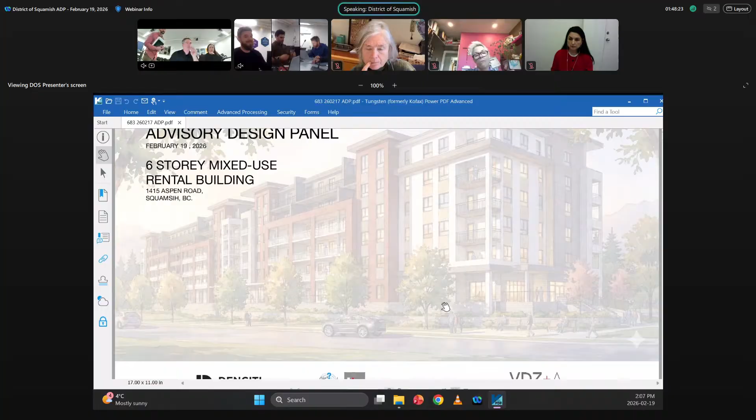Okay, so my name is Steve Watt, I'm an architect with Integra Architecture, joined today by Jessica Thiessen from Van der Zalm and Associates Landscape Architects, and Guadalupe Font from Denciti Development Corporation, the owner.

I'll give a quick overview of the design for this mixed-use purpose-built rental development. In context, the site's located in the North Yards neighborhood between Highway 99 and the future Pioneer Way connector between Aspen Road and Government Road. And there's a number of DP area guidelines that are applicable.

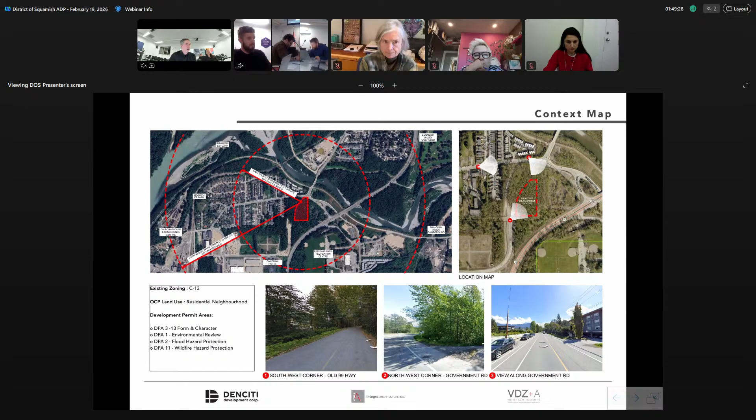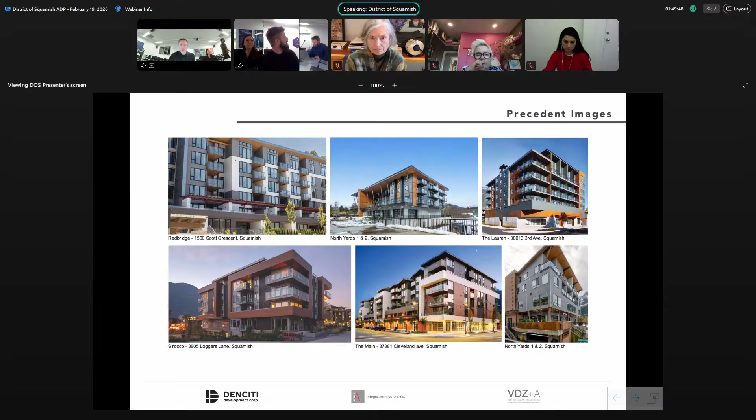So we're proposing a 6-story, pretty linear building, essentially 2 buildings with a connection to form a strong street presence along the new Pioneer Way. 163 purpose-built rental units are proposed, including 3,500 square feet of indoor amenities, a daycare, and live-work units.

Parking is provided at a 1-to-1 ratio in a mix of surface parking and underbuilding parking. This building proposal is contemporary in design, employing high-quality durable materials to satisfy the wildfire hazard guidelines, and will be subject to meeting Energy Step Code Level 3, Zero Carbon Level 4, and as such also employ several other sustainability objectives, including EV charging, low flow fixtures, energy efficient appliances, and heat pumps.

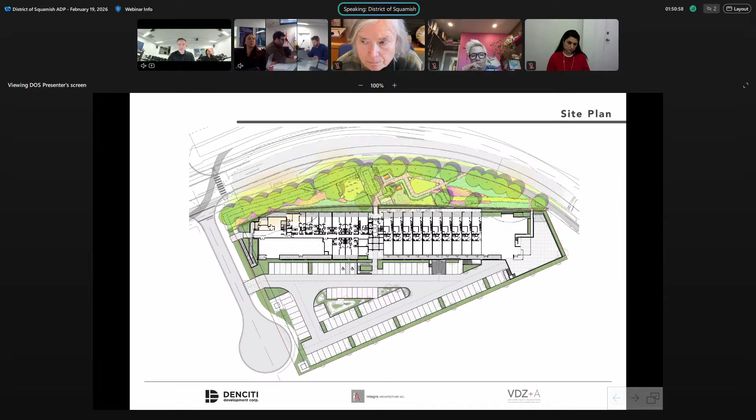Going to the site plan, the strategy is to create street presence with a linear building along the west edge, flanking Pioneer Way. Parking is concealed from this frontage by locating it to the east and under the building, accessed from Aspen Road. A commercial component is required in this project,

which is being delivered in the form of 10 live-work units, which are the sort of tan-colored number 8 there. That's in the north half of the building. There's also the 4,200 square foot daycare space, the blue number 6 at the north end. The south half of the building contains the main lobby and fire department access point facing Aspen Road, some residential

units, service rooms, and indoor amenities, which are to include a social room, work area, and gym, though nothing's programmed at this stage of the project. There is a purposeful break in the middle of the building to break the length and break the massing. This area includes vertical circulation and an arrival plaza off the parking area to orientate the commercial and residential visitor.

A pocket park is proposed for the orphan slice of land between Pioneer Way and the property line on the west, number 10.

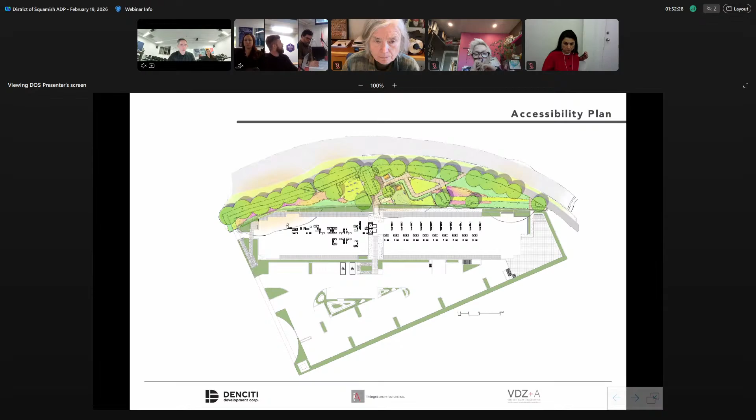There we go. This highlighting indicates in blue all the level 1 barrier-free access proposed to and within the building. We have 2 pedestrian ramps, one at the main lobby on the south side of the building and one adjacent to the central plaza.

Accessible parking stalls are adjacent to the plaza ramp. Some additional accessible stalls are located in the parkade. For this project, we have to provide by BC code 20% adaptable units, which we will be doing. We have not selected which units will be applied those provisions

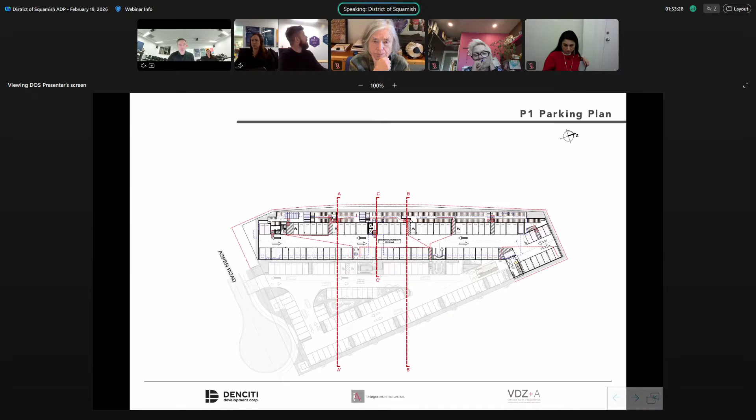at this point. Quickly on the parking plan, we've tried to minimize this for cost as much as possible. It fits snugly under the building along the west edge of the property. We have garbage storage in the elbow on the north side, which has direct access out to the drive aisle for ease of collection. And all our bike storage is located in this underground or underbuilding parkade.

Level 1 we've sort of discussed already through the site plan. Level 2 to 6 for construction and structural efficiency, the plan is stacked through all levels. And you can see more clearly on this one, the minimal connection, which is a double elevator and an exit stair and a corridor.

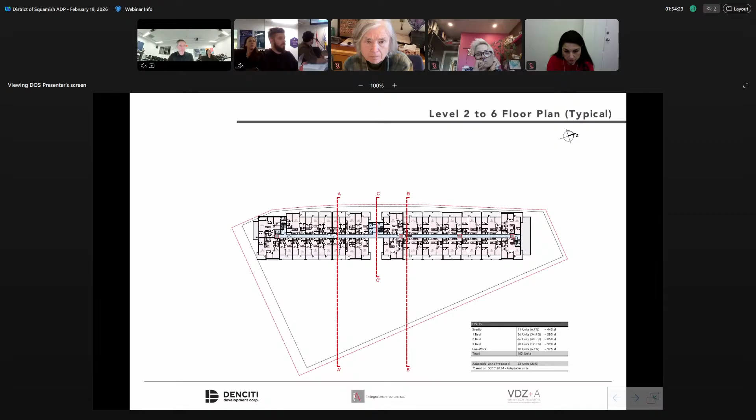To the building elevations, to articulate the massing, we've expressed the corners with roof pop-ups and frames. We've framed the balconies in groups and used color to add to the perception of recession, using the dark to appear to recede, the white more of a foreground color. The points of entry and circulation are marked commonly with the wood-toned wall accents against the white cladding.

The end elevations, north and south, are much simpler. The south elevation includes the main lobby and includes some stone cladding at the base and signage, as well as the wood tone material in the white cladding above.

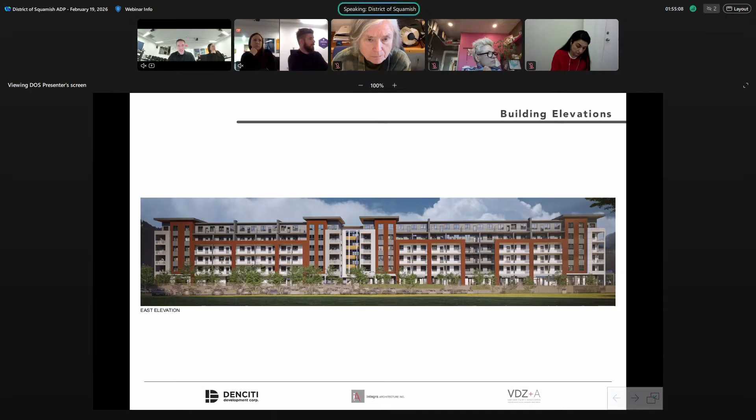The east elevation facing the surface parking is treated similarly to the Pioneer Way frontage, but includes commercial signage opportunities along the face of the live work units on the right-hand half, with the daycare at the extreme right on the first floor.

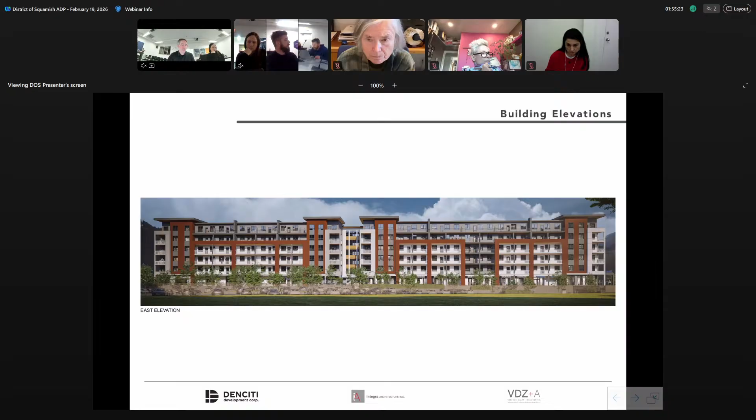This image shows more of the richness of the materials proposed, which include red corrugated metal, fiber cement lap siding and panels, wood-toned lap siding and wood-toned soffits, and aluminum picket railings throughout.

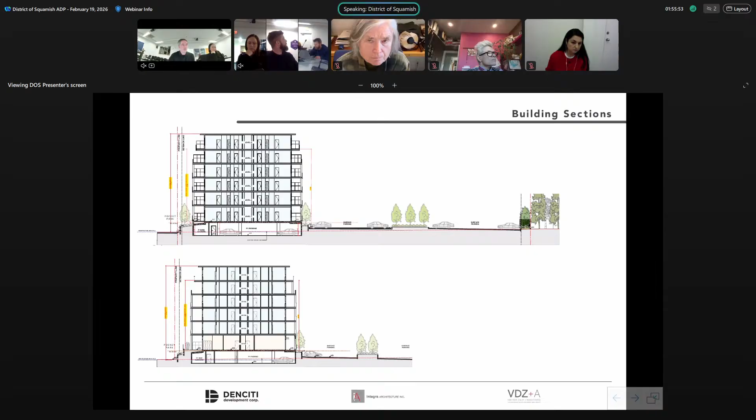The sections are fairly straightforward. We are, of course, raising the first floor to comply with the flood control level. The section on the right, lower right, shows the reduction in massing at the plaza break midway in the building and the potential for a through connection to the pocket park.

There's some shadow studies, fairly self-explanatory.

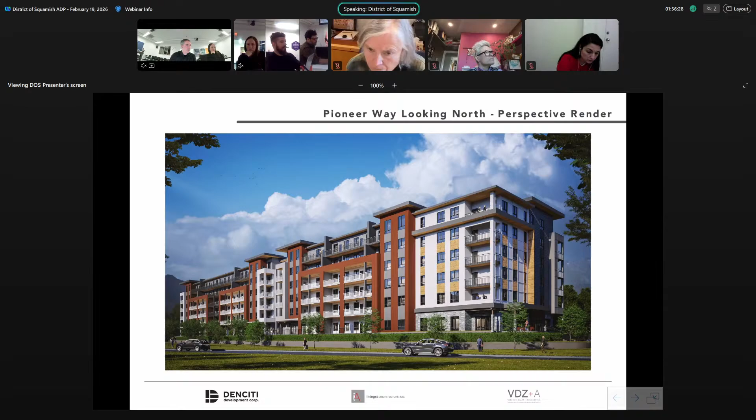And then some renderings, the frontage on Pioneer Way from the Aspen end, and then from the opposite end with the daycare in the foreground bottom left.

And then a view from the surface parking looking towards the central plaza with there'll be some commercial signage there, and signage along the live work units heading towards the right.

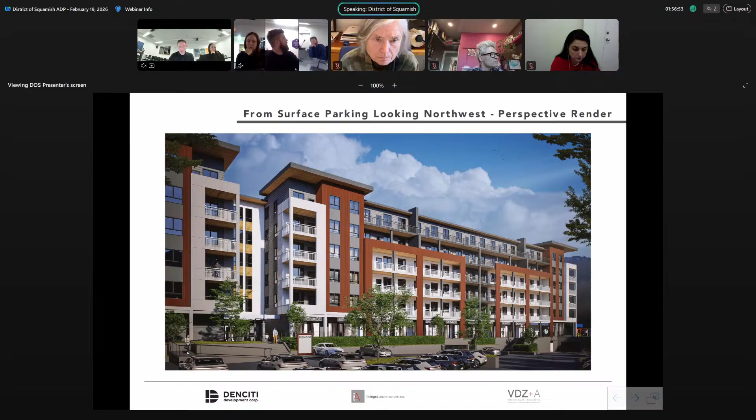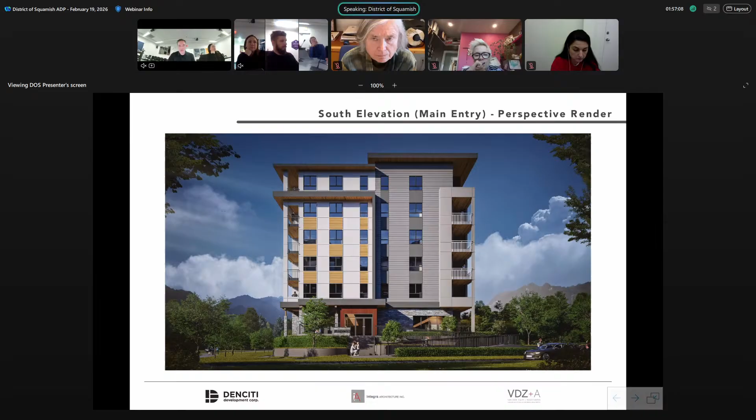Close up of the south elevation, just to show the pedestrian access. There's a sign at the top there and the cultured stone material at the base.

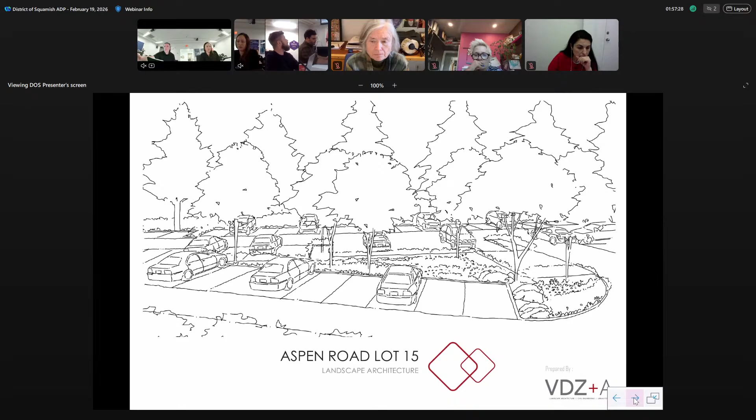Okay, so we've looked at the site plan already a few times, but I'll just cover a few different landscape features throughout.

We have, if we start on the Aspen Road side there, the entrance, the main lobby of the building. We have an accessible ramp that goes up to that building, as well as a staircase that gets us up to that flood construction level.

Throughout the parking lot, we have a variety of trees to provide some shade and greenery. We have a river rock bed in the center of the parking lot that may end up providing some stormwater management, but otherwise is a sustainable and drought-resistant feature of the landscape.

Through the middle, between the two buildings, we have a courtyard that will lead you from the parking lot through to either building, but then also through to the pocket park that is on the west side of the building.

We have on the north end the outdoor area for the daycare, so that's taking up the majority of the outdoor amenity space on site. That is the size required for the size of the daycare that we're proposing. And then we have a few different access points to the west off of the site and into the pocket park for lots of pedestrian connections through the site.

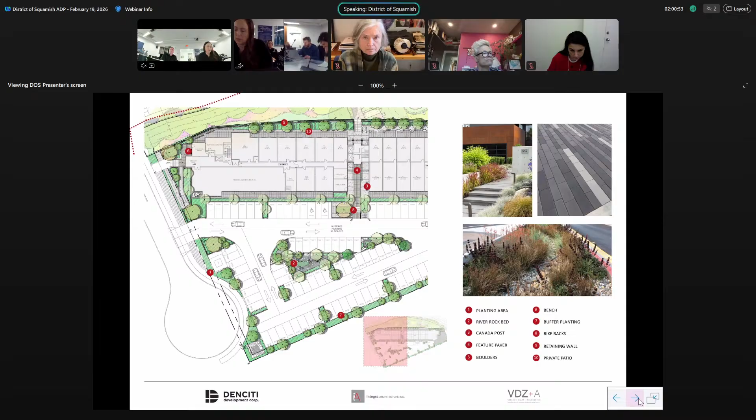In terms of plant material that we're looking at for this project, we have a variety of native and adaptive plant material. We've focused on plant material that is bird and bee friendly, but also we are trying to strike the balance between the fire smart regulations and not attracting wildlife. So this is where we've landed. We have a variety of bloom periods and features within the plants.

Oh, that was it. Thank you.

Excellent. Okay, thank you very much for that.

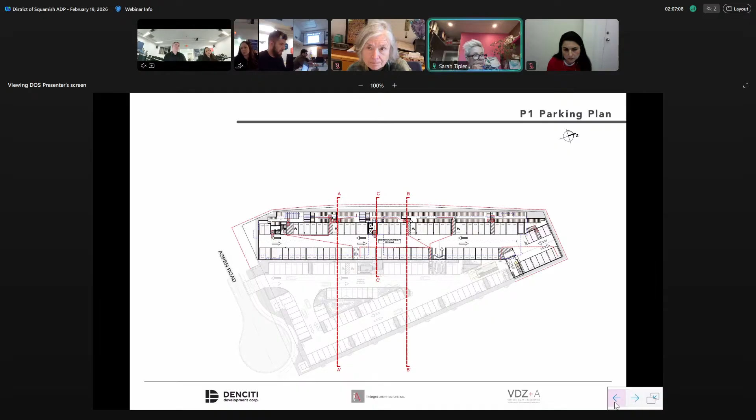And then it seemed that you were going to put a number of adaptable units in the live work spaces, and it looks like they have a wheel-in shower, but with a door on them. Is that correct, is that sort of what you've done? The live work units will be provided with an accessible or universal washroom.

These 10 units won't be the sum of all the adaptable units in the project. We have to provide 33 in total, so there will be a mix of units provided as adaptable on the upper levels.

Can you tell me, are all of the main entrances, and the entrance to the daycare and the garbage, going to have automatic door openers? Main entrance to the building for sure. By code, I'm not sure if the daycare would require it, but we can always provide it. That daycare provider might want to provide it anyway. Yeah, that's all my questions. Thank you.

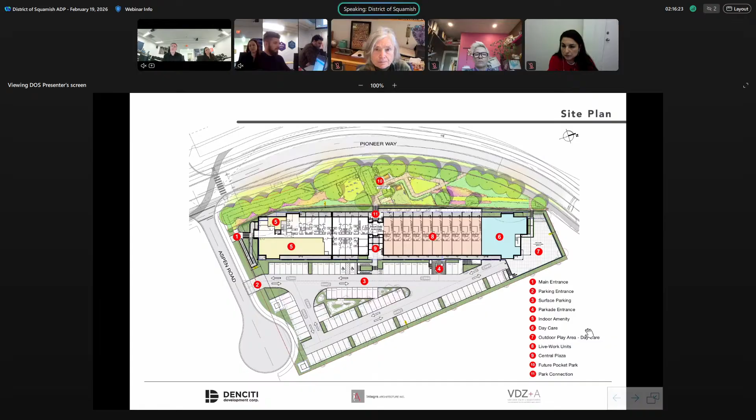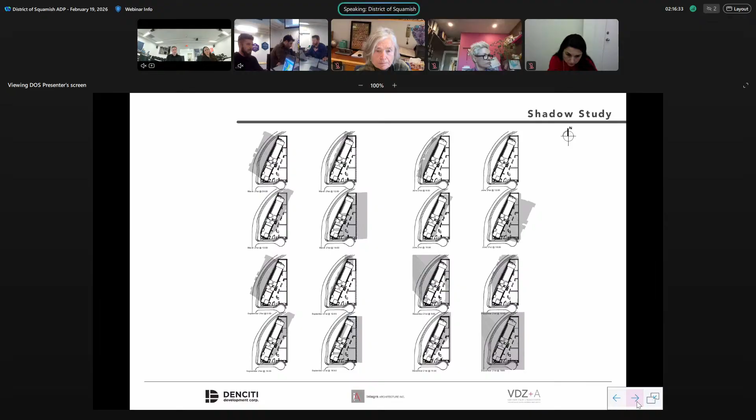Thanks for the presentation. I had a question on the tree schedule. There's a list of trees proposed on the plan, and it's slightly different than the images on the planting palette. Is the Acer platanoides still proposed as a significant tree component in the plan? The trees on the drawings would supersede what's in this image slide.

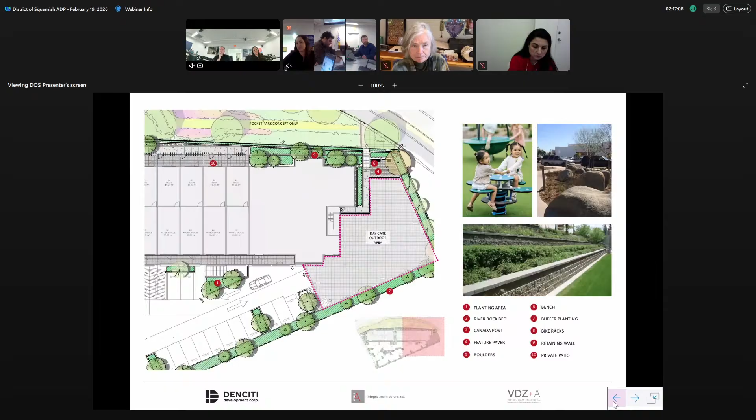Okay. And then so the pocket park is a concept only, so we're not commenting on the design of the pocket park at this point, or? We'd welcome comments on the concept as it currently is, but there are still finer details to be worked out with our parks planning team. Okay.

Are you able to give a brief overview of the elements of the pocket park? Yeah, I can give you a brief overview. I wasn't involved in all of the discussions. We did a concept based on what the district expressed some interest in. The main component is a dog park, a fenced-in area. We also have a bit of open space and some social gathering space with seating and hardscape. Primarily the pocket park is open space and naturalized planting.

And then, you might have said this and I missed it, in the parking lot the central area with the river rock bed, is that to act as a rain garden, collecting stormwater? At this point it's got potential for that. We haven't gotten into detailed stormwater management, but we felt it was a good feature regardless of whether it could be functional for stormwater management.

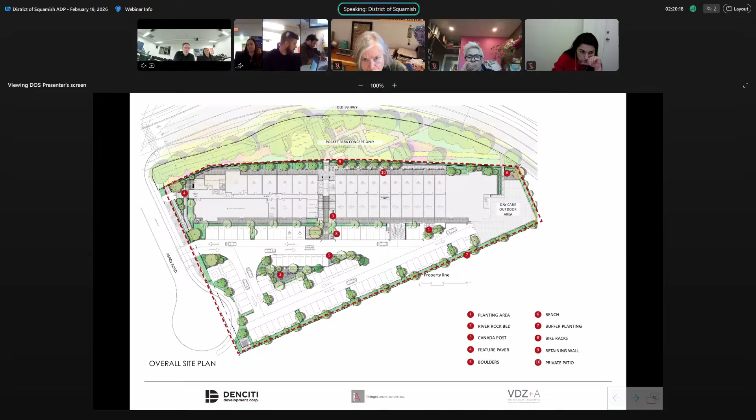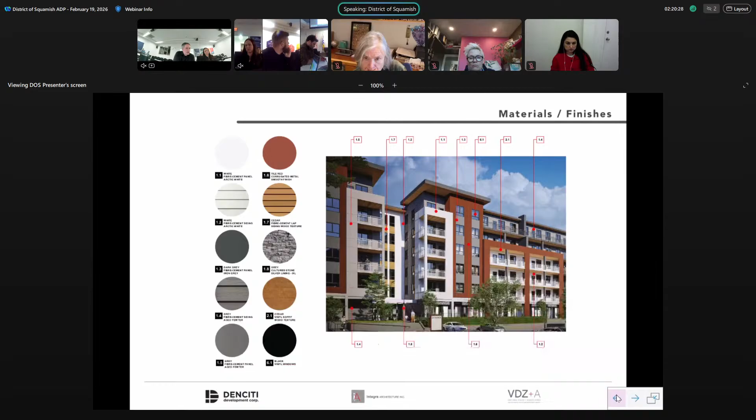And then, what's the area of the covered outdoor area for the daycare? Is there anything proposed for that, or is it still in flux given that it's not designated yet? It's still somewhat in flux. We did allude to something in one of these renderings here, this elevation — this part here is covered. I know there's a proportion that has to be covered for daycare. We would just need to flesh that out when we get more detail.

Would the intent be that when you know how many kids there are and you have that required overhang, would it be an architectural solution or more proprietary? I think we'd lead with the architectural solution — I think it ties us into the building really quite well there. Okay, thank you.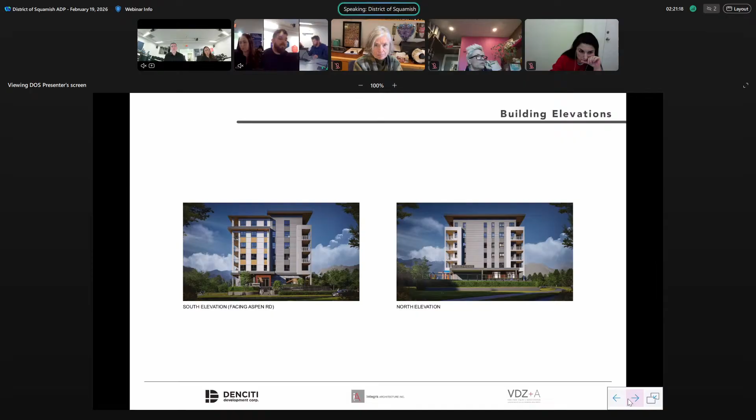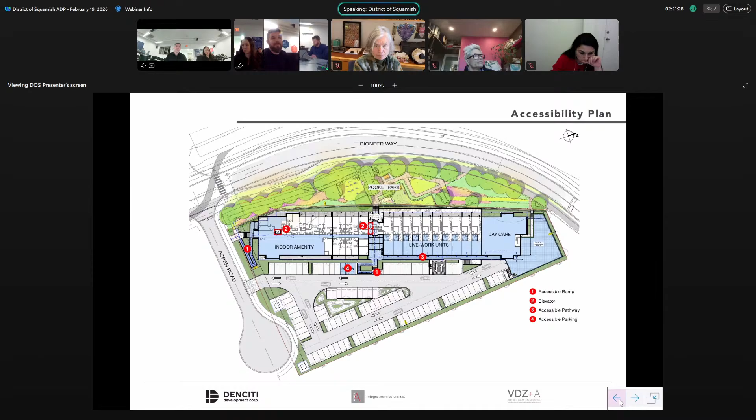Quick question for staff. I didn't manage to see it in the stats — is the garbage room meeting the minimum size requirements? I believe they had some stats on the drawing package, not in the... Oh, I looked at the applicant package. Yeah, they were both attached. Anyway, there are some numbers in there. One thing to note is it doesn't have separated commercial and residential — that's probably the only item that doesn't strictly align. Okay, thanks.

And is there a requirement for one firewall in this building? See in the plans.

That is correct. And the strategy for masking that was to add additional ones on the elevation - we've used that as a recurring motif just to break up the facade at the top two levels.

My last question is about the strategy for signage and lighting of these commercial workspaces. I saw a note for signage that looked like it was mounting to the fascia, but there's no detail. It's a little early in design development for that, so we have placeholders - thinking hanging signs for the live-work units, maybe a fascia mounted sign for the daycare at the end of the building, a monument sign at the base of the stairs for the central plaza, and a main entrance sign on the south elevation at the lobby.

What was the thought behind the general commercial strategy for those entry doors? Is it a storefront system, mostly glazed, or punched openings on the elevation? I think it was more punched openings for this stage. We may lean towards a storefront if we get more direction from the owner. Okay, thank you, that's all my questions.

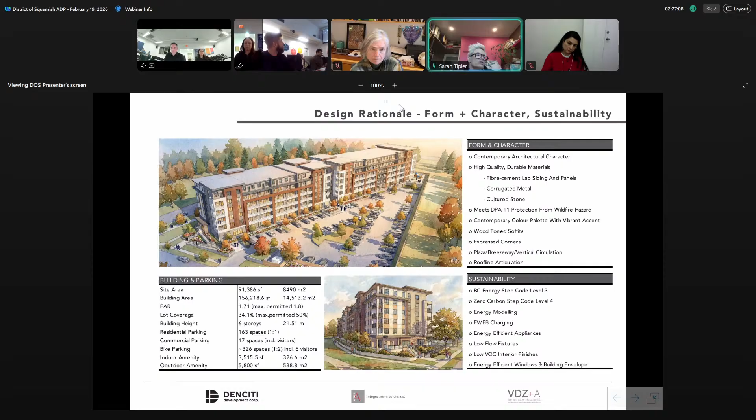Make sure that you've got tactile warning strips at the top of both sets of stairs, just because access to the ramps and stairs are relatively close together. I'd encourage you, in the adaptable units with a wheel-in shower, to ensure the shower controls are located centrally in the side wall so they're reachable from a seated position. And though I know it's done for cost, I would avoid cultured stone if possible. That's all my comments, thanks for the presentation.

Thank you, and next up I had Kim.

My main comments are on the entrance, particularly the entrance at the center of the building, at what you call the plaza, I think, because that's the one that's obviously going to be used. Architecturally, it doesn't read that strongly. I think if you could do something stronger to really punch that out, that would improve the readability of the building.

I question the entrance to the daycare, because you're going by all these - I guess they're live-work, are they stores? I'm not quite clear on what they are. They're very small, so as a live-work space they're quite confined. But taking your kids past all of that, I think, is not ideal. If you could get an entrance that is more for the daycare, at the daycare, with a drop-off there, that would perform much better.

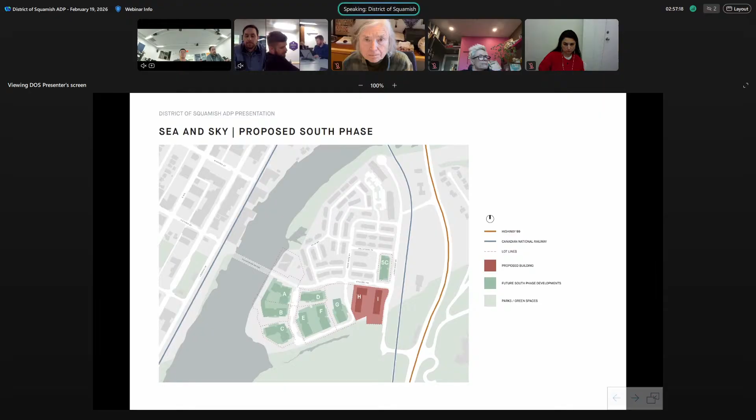You can see the scale of the townhouses to the north is quite a bit more fine grain, but they've also set up a bit of a language that we're trying to pick up on.

So you can see in some of the images here, still fairly simple forms, and the roof forms really identifying the residential character, and a more vertical street wall, differentiated by colors, but overall fairly simple massing.

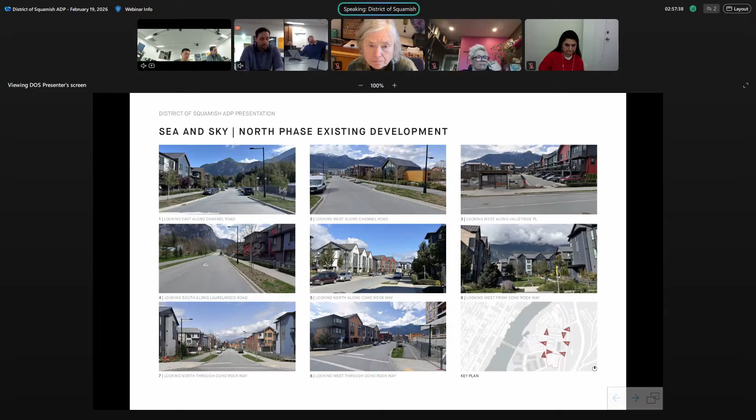When we started to rethink the initial rezoning massing, we went back to the OCP and the principles, in particular the views that are really important on the site, both views far and near, and also the porosity of the site. So that's really been a driver.

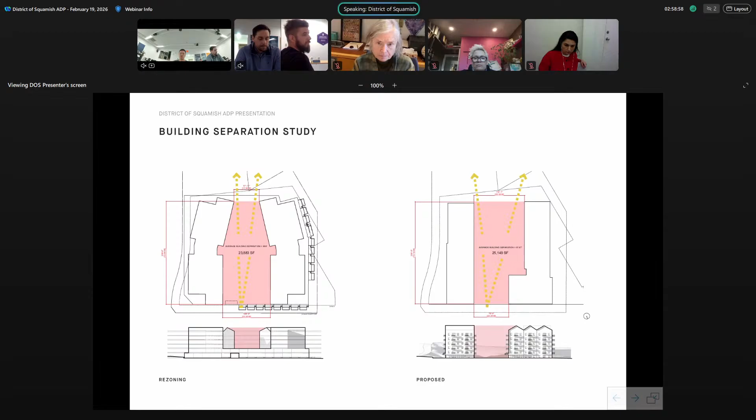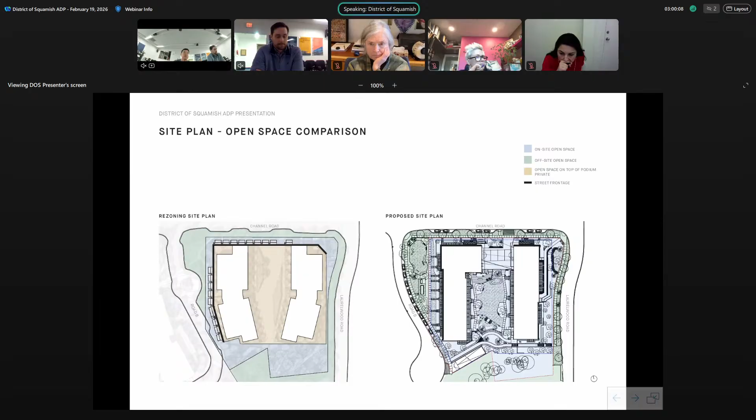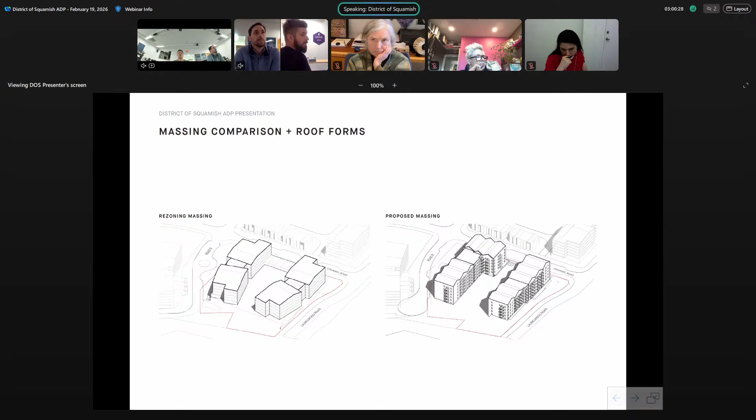A massing comparison in terms of roof forms: on the left, bigger, boxier, shallower pitched roof forms, versus what we're proposing on the right, much more compact, but still identifying the individual vertical elements accentuated by the roof forms, breaking up those bigger masses into smaller elements.

This view shows the northwest corner, dog park in the foreground, and how the building sits in the landscape as opposed to being flanked by row houses and townhouses across the perimeter.

Is there anything to add on the dog park? Or at this point we'll get back to you in the landscape design. But I think we were really happy with moving away from the townhouse and how much greenery is allowed at grade now, and the function of the ground floor units being able to go right to the sidewalk.

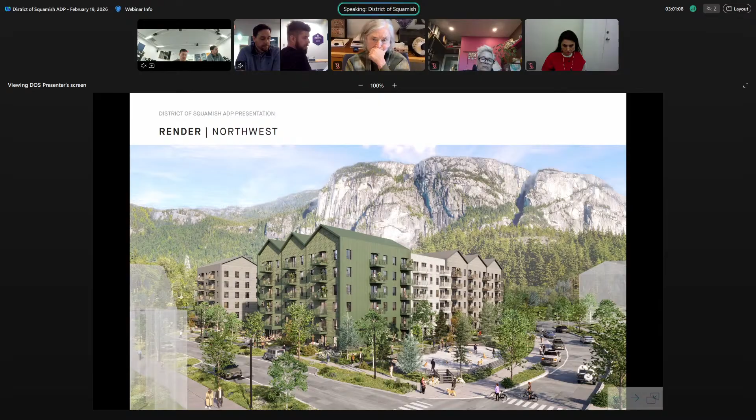So the open space site plan, the arrows emphasize the porosity created through this design. The red arrows indicate the main residential entries on the north. The parkade ramp has also been shifted relative to the rezoning to the south, so it takes it off the main street that provides access to this whole neighborhood. That's a big improvement from a traffic management point of view.

Then the forecourt that Kerry mentioned is shown with that beige dot at the top center. We want to bring all of the loading activity off the street, but also take advantage of the hardscape created for outdoor play, street hockey, that kind of thing, so it can actually be used by residents when it's not being used for loading. It's tucked on the side, so it's differentiated from where the residential lobbies are.

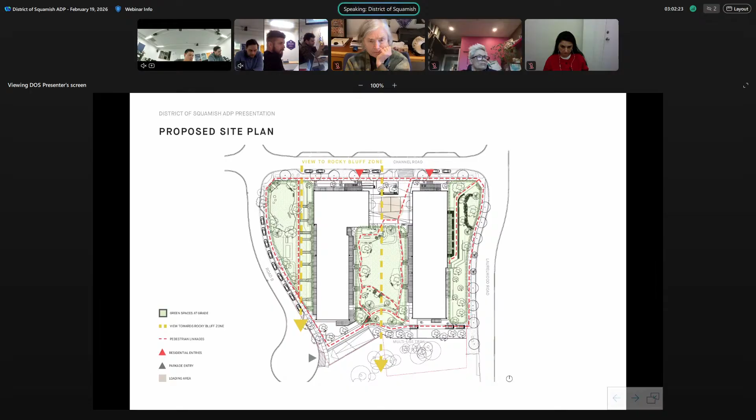The red lines represent circulation through the site. We have a lot of opportunity to traverse the site, both north-south and east to west, and access across the site via stairs to Laurelwood. This is a view of the northeast corner and how the grade starts to impact the form towards the southeast.

And just some gestures with the roof forms coming down and creating oversized scaled canopies to emphasize the residential entries facing north, and a contrast between a punched window expression for the residential level versus more glazed expanses at the lobbies.

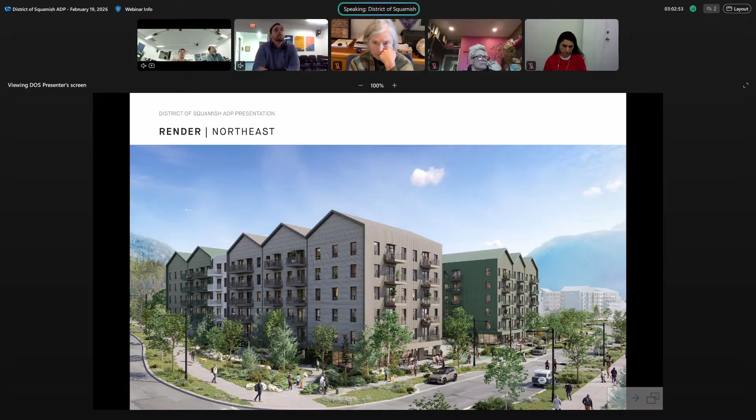Along Laurelwood, there's a pretty significant grade change, so your experience of the building will be quite different driving north as it emerges as you fall down the hill. We've taken advantage of that to tuck in bike parking in the southeast corner of the site, shown in white on the top elevation drawing. This allows accessible bikes at grade, so people can wheel their bikes across the site directly into the bike facility without going into the parkade.

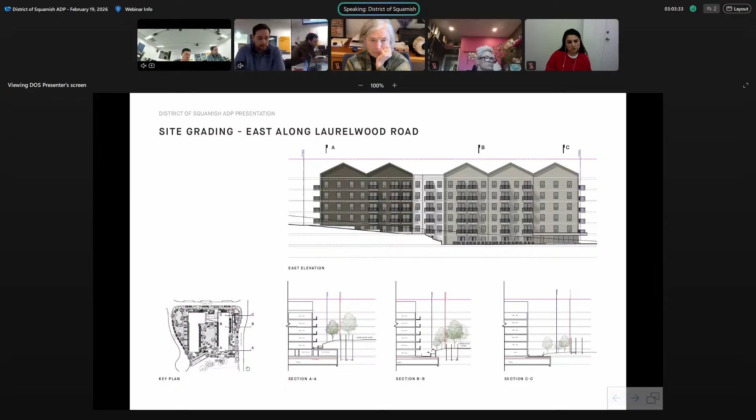A minor redesign of the rezoning pathway. The pathway shown in the rezoning to connect Laurelwood to the site to the west was a switchback, intended to be accessible, but Laurelwood itself is a non-accessible street with a slope steeper than an accessible ramp. That switchback also impacted trees in the southeast corner. So the proposed design is a more direct walkway that preserves those trees, and the parkade is pushed north to avoid impact to the tree roots.

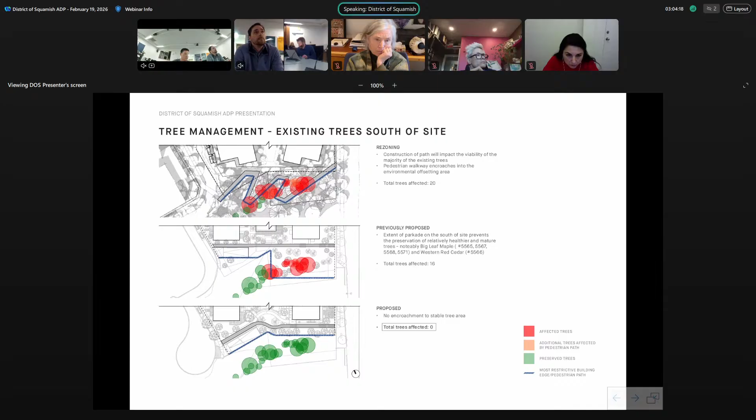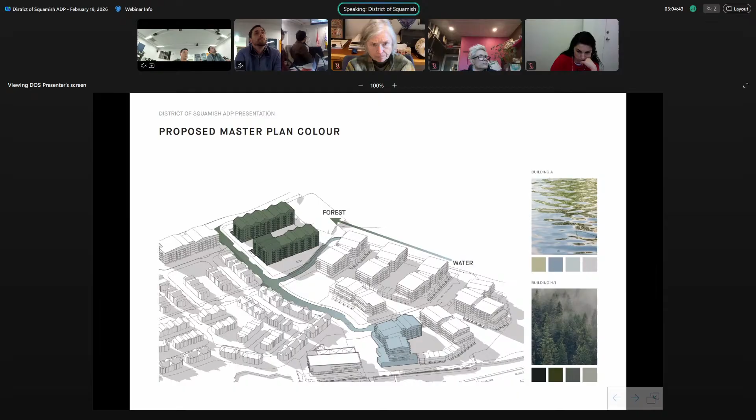We also wanted to think about the overall context and a strategy of color and material, transitioning from a more water-informed palette near the shore to a more forest-informed palette to the east. That's how we arrived at the color scheme presented, shown with a combination of corrugated metals and cementitious panels that are color matched to give tone on tone variety and interest through the textures of the cladding, rather than too much contrast. This way the individual elements are clearly articulated and the streetscape of the townhouses is broken into identifiable elements.

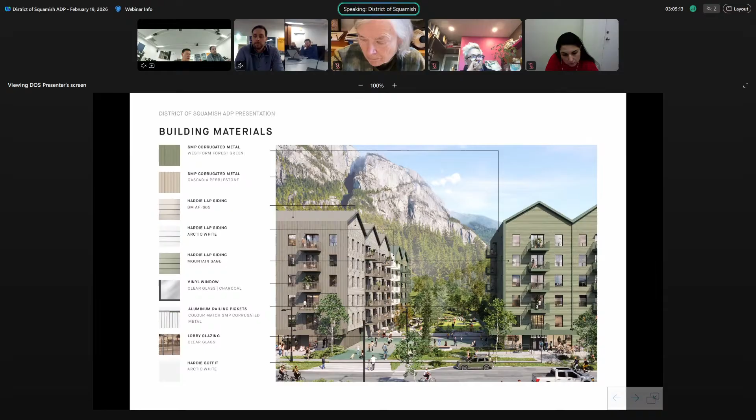And then just another rendering view from the south looking through the site, showing how the building sits with this incredible backdrop. And I'll hand it over.

All right, thanks, Tyzo. Hey everybody, my name's Thaddeus Holland, I'm a landscape architect with Perry and Associates. We really pulled our inspiration for the landscape design from the immediate adjacency that we have with the bluff.

A lot of the previous phases were just a flat site, wide open. But here we're really trying to embrace the forest aspect through the materiality of our palette. We also wanted to create the perception of the bluff spilling onto the courtyard podium, to really blur the line between what's public and semi-private.

Tyzo mentioned the porosity through the site. This was one of the key drivers for laying out the pedestrian connections and walkways, not only internally, but also providing direct connections to the pedestrian network along Laurelwood and Cranwell Road. These are all accessible pathways with the exception of that east-west connection Tyzo mentioned, where we do need stairs.

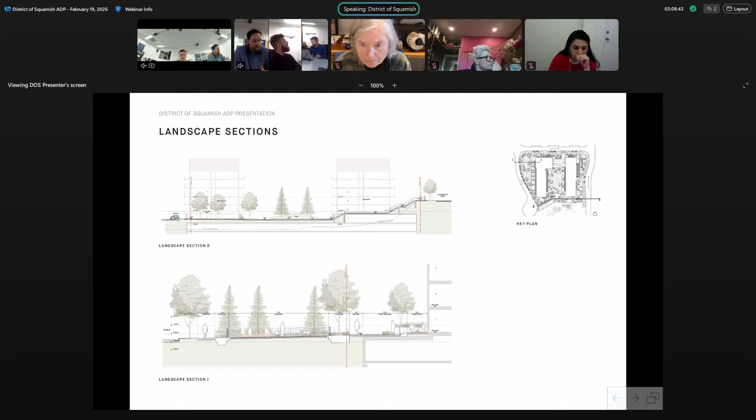The section on the top of the screen depicts the elevation change of about 7 meters between Laurelwood and the new Road B, so you do need a fair bit of stairs to get down from Laurelwood to access the courtyard. The section below shows the extent of the parkade, and once we're beyond that, we have more opportunity for deeper soils, which will support the larger trees specified along the perimeter of the site.

Maybe one comment before - there was a question about weather protection on the top level of the building. I think the perspectives aren't helping because they're right at eye level of where we're proposing a metal plate canopy above those top level balconies. The intent is to give some breathing room to those gable forms by not having a very thick slab, but they're still intended to be covered with weather protection above those doors.

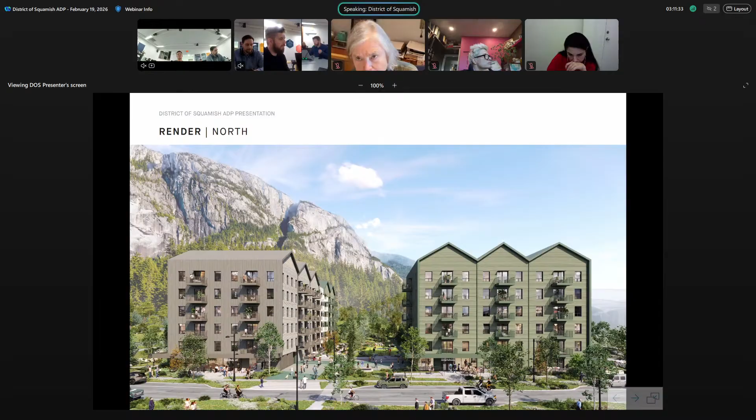Okay. There is a flight of stairs to the south of the play berm, and I've been trying to figure out, looking at the grading plan, why that stair is necessary. I think maybe there's not quite enough detail in the grading plan, but can you explain why there's that staircase behind the play berm, south of the play berm?

I think you're right, where we can eliminate that with a closer look. We reworked that area to provide the 2-meter bikeway pathway to the bike storage, but I think the grading's close enough where we can eliminate that stair and make it so that courtyard becomes fully accessible.

And then with the pea gravel for the dog run, were there any other materials you were considering, or what was the reason you chose pea gravel at this point? Yeah, pea gravel for cost was the main reason, for the big area, but we were considering turf, artificial turf, or maybe a combination of the two.

Okay, I think that's all the questions I have right now. Thank you, John.

Thank you for the presentation, I don't have any questions. And ADP first, alright. Shora? Questions? No questions, thank you. Great. Kim? No questions here either. Okay. Sarah?

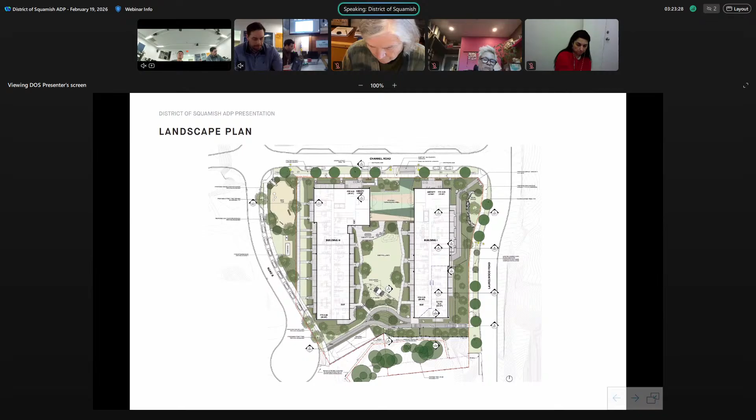So I'd encourage you to activate it with play structures. Maybe there's some opportunity for covered outdoor spaces of different kinds. We saw during the pandemic some communities figure out ways to create covered outdoor spaces for people to gather in a safe manner, so maybe there's some inspiration that could be drawn there.

The landscaping question I'll leave to the landscape experts to comment on, and the dog park I've got no input on that one. So otherwise, those are all my comments.